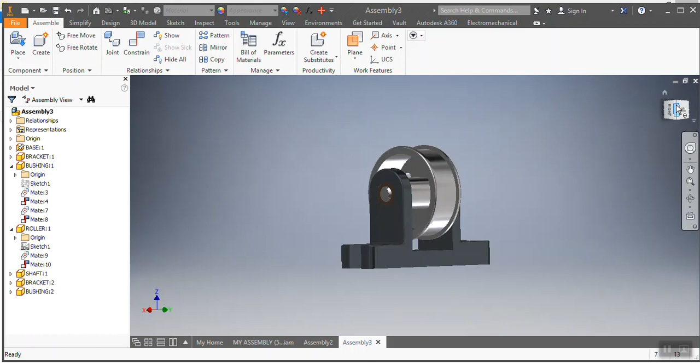So today what we're going to be doing is this assembly that you're seeing in front of you. Last time in the other video when I was talking about assembly, I said when you have to do an assembly, you need to make sure all the components, all the elements, are in one folder or one file.

Without wasting any time, I'm going to show you how this needs to be done. First, I'm going to go in and create a new one. It's English since the dimensions are in inches. I'm going to create.

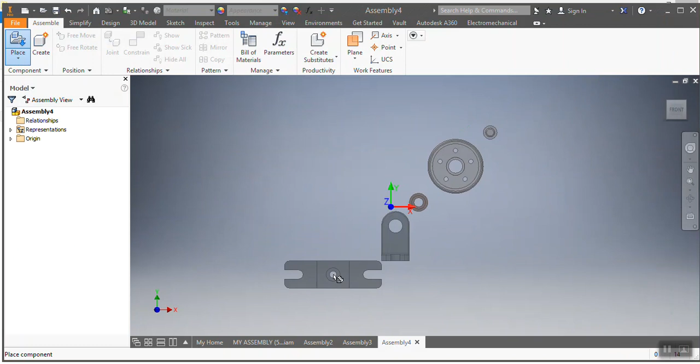Then I'm going to go to the top left of my screen where it says place, and fetch all my stuff. I'll press them there, then escape. I need an extra bush - you can see I just took one of each.

So I need another bracket, another bush, and I think the bush is in bronze. I'm going to fetch the other bush and the other bracket, select both of them, and say open. Here they are, I say escape.

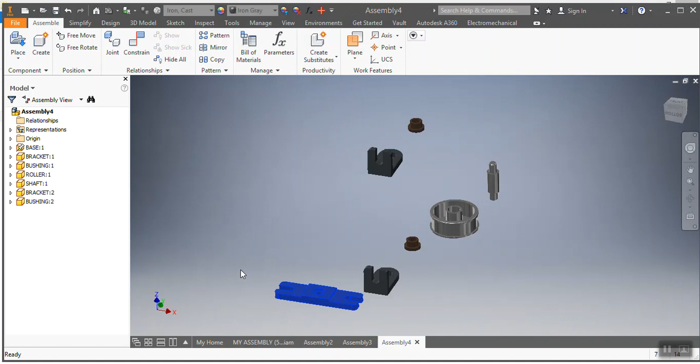Now after this I need to make sure of one thing - I need to have my reference part. As my reference, I'm choosing the base of my assembly, and then I'm going to ground it. When it's grounded, everything else can move, but the grounded part won't be able to move.

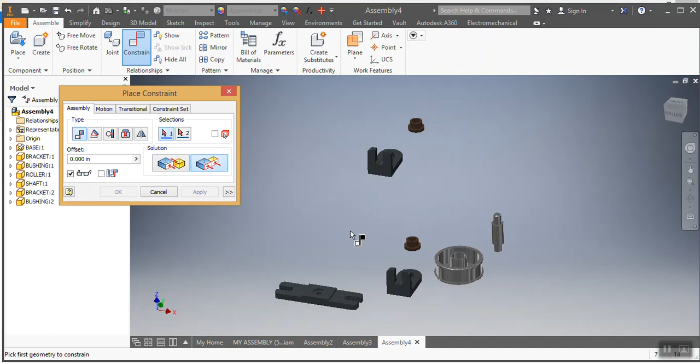Then what I'm going to do is go and constrain. From there I'm going to choose how I want my part to be like, so I'll go on flush. I want that part to be flush with that part of my bracket to be flush with that part of my base.

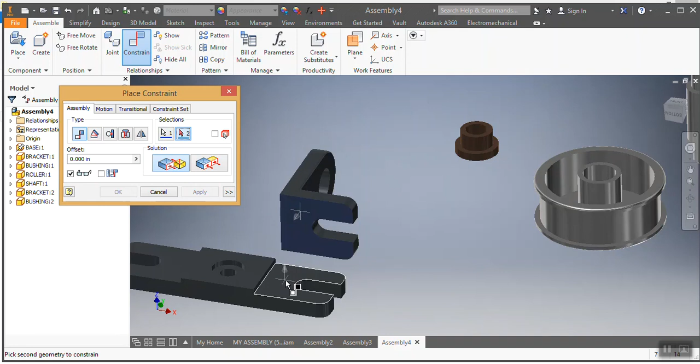Then I say apply. After that, I want that part of my bracket to be mated with that part of my base. I say apply. Then I want that part of my bracket to be flush with that part of my base. I say apply. There we go.

Then I want that part of my bracket to be mated with this part of my base. I say apply. After that, I want that part of my bracket to be flush with this part of my base. Apply.

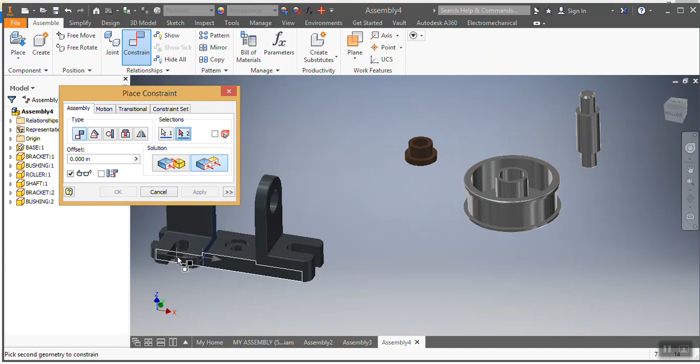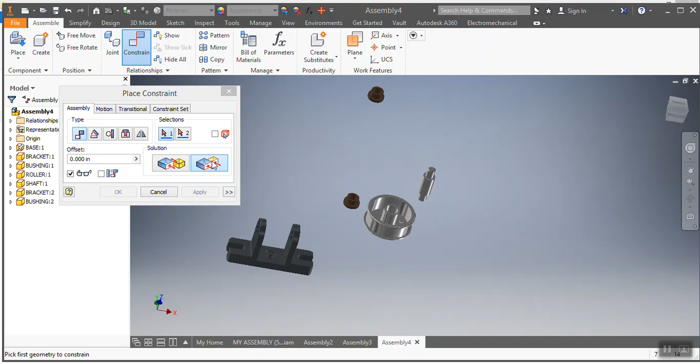Then next, I want this part of my bracket to be flush with this part of my base. I say apply, there we go. It does not matter the order you choose to do your assembly, as long as you get it all together. Now I want the center line or axis of my bush to be mated with the center line of my bracket.

Made with the center line of my bracket. There we go, I say apply.

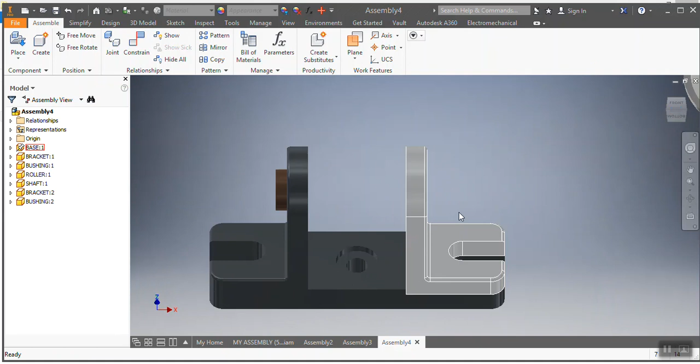So to avoid any confusion, look at what I will do here. Look at what I will do here. Come on, can't you be serious? This is time to be serious, man. I'm going to pull this out. I'm going to pull that out.

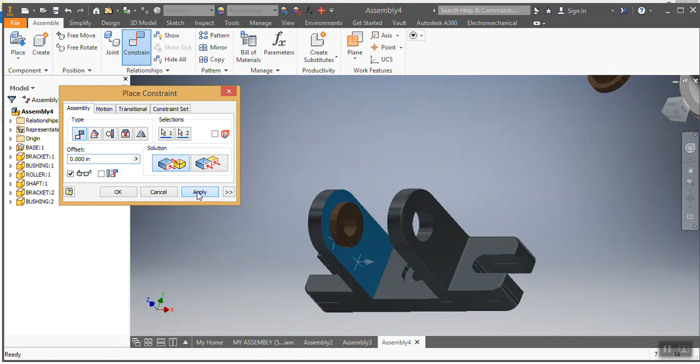And then, be serious please. I'm going to go and constrain again. So I want that part to be mated with this part of my bracket. I say apply, so I go back. I say mate, I want that part, the center line, to be mated with that center line. I say apply, so I'm going to put again.

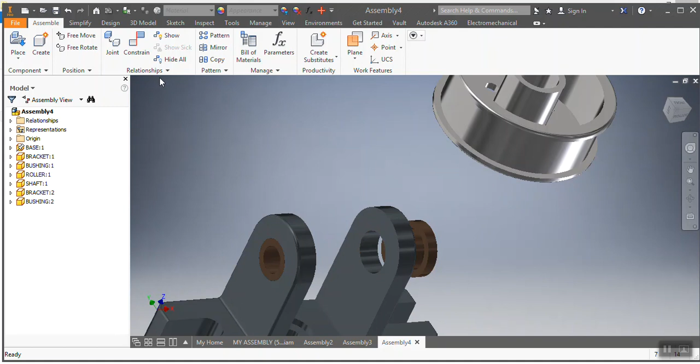I just want to make sure about everything I'm doing. First, I'm going to move - please don't be stubborn. So I'm going to move that. I want that part of my bush to be mated with this part of my bracket. I say apply.

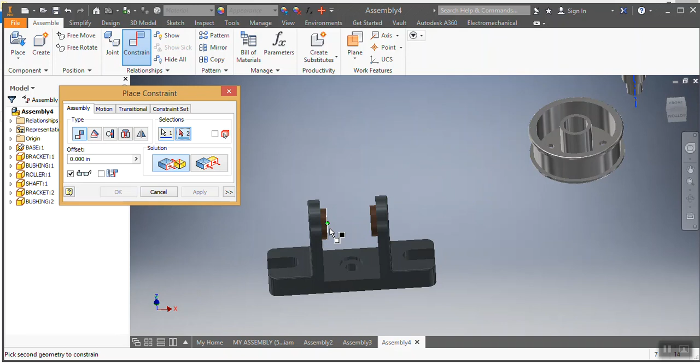So that's it, you can see I have that in place there. Now I want the center line of my shaft to be mated with the center line of my bracket and bush. I say apply. It's going so good, there we go.

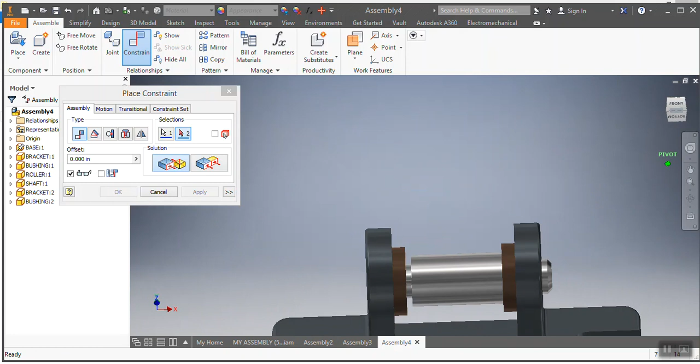Now I want that part D of my shaft to be mated with my bracket's D - sorry, my bush. Then I say apply. There we go, you can see it's going to be beautifully done.

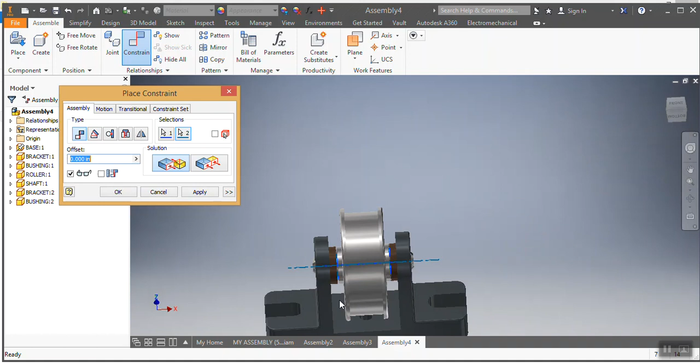It's going to be beautifully done. Here I want that part D, the center line of my roller or the axis, to be mated with the center line of my shaft. I say apply. Right, so now you can see there, I can move my roller.

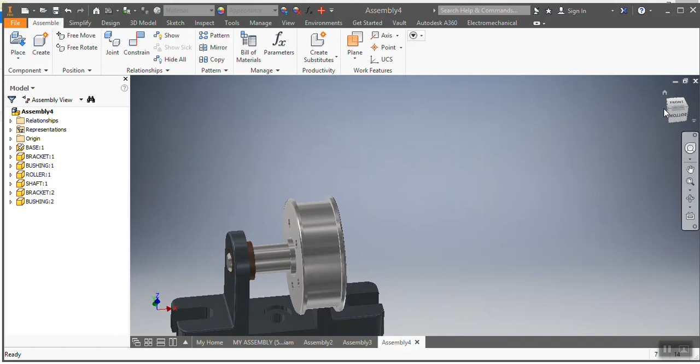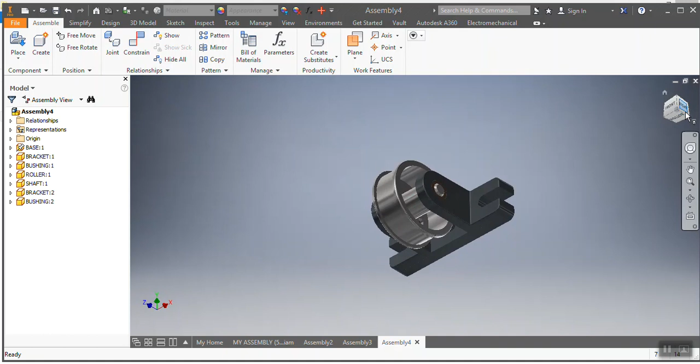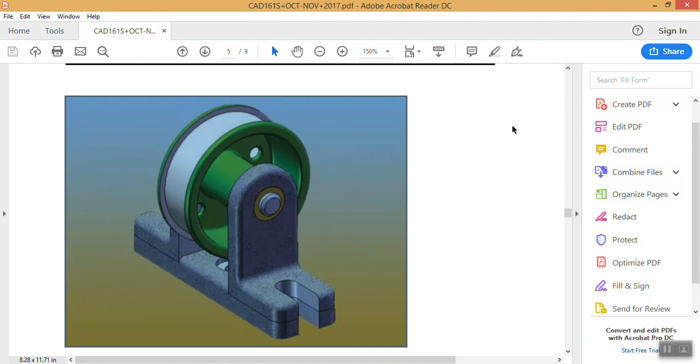So now I'm happy with everything, I've done what I needed to do. You can see now our component is assembled, everything got together. There's no welding needed, as it was not required per our drawing. So yeah, I can see we've done what we're supposed to do.